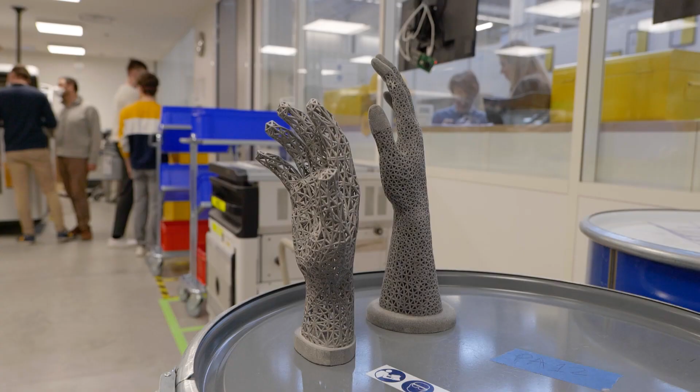Today I've got the absolute pleasure to be at Decathlon in France on behalf of AMFG. Arnaud, thank you very much for this great opportunity. It's been an absolute pleasure walking around this phenomenal facility that you have. Now, firstly, tell us about your business and how it started. Thank you for being here.

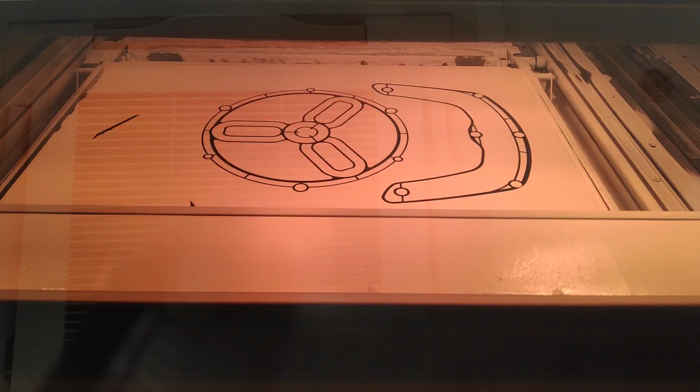The business of additive manufacturing in Decathlon starts around 7 years ago. We started very small, with 2 guys, 3 guys, with 1, 2, 3, 4 printers. And we grew step by step, introducing more technologies. We started with prototyping for the conception teams close to here, in this site of the B'Twin Village. Then we moved to spare parts, production parts also. And now we produce thousands of parts every year for our facilities all over the world in Decathlon.

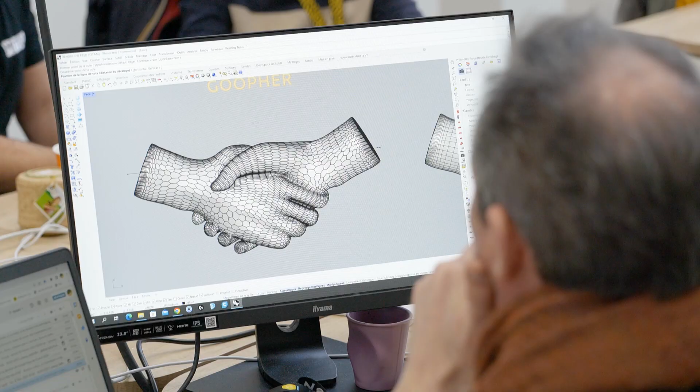Now, all around the world - I want to give our audience a bit of perspective on how large Decathlon is as a business. You have over 80,000 employees around the world, is that correct? We have almost 100,000 employees right now in the world. We are present in more than 42 countries, so it's really a large company. And we design and create our own products. Having an additive manufacturing lab internally really saves us a lot of time, saves us money, and helps us make better products.

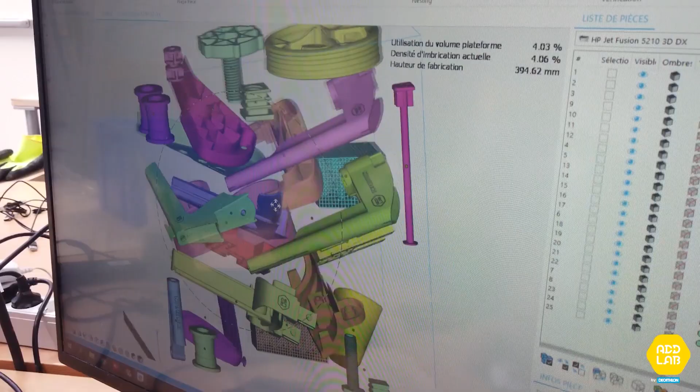You're actually the largest sports retailer in the world, I believe. Yeah, indeed. Now, AMFG - we're going to be talking about their software - but firstly, can you explain why you personally wanted to get into additive manufacturing?

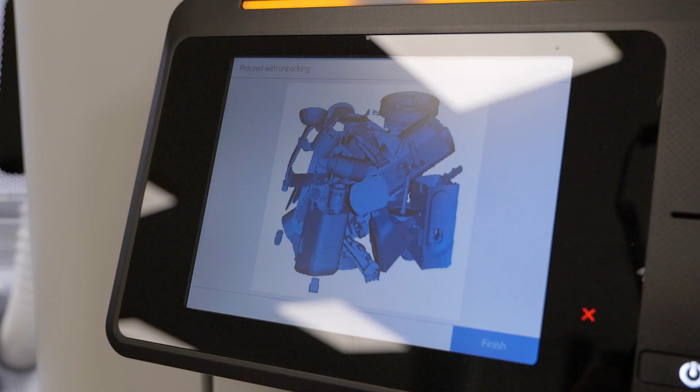When I met Julien, I discovered a bit of additive manufacturing. I just saw some videos over the internet, and it was really the beginning of this technology. I thought it was really cool. And when I went deeper into additive manufacturing, I discovered the full potential this technology has over the industry, over the supply chain management. And I really wanted to be part of it. I said, okay, this is something very cool that can change the world, and I want to help the world be better thanks to additive manufacturing.

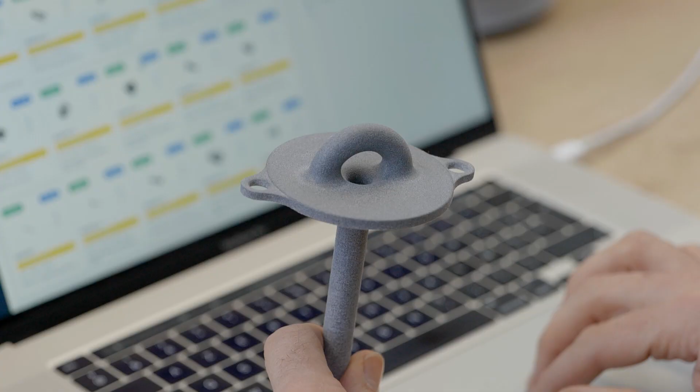And how does AMFG play its part in this strategic partnership that you have together? AMFG helps us to scale. Thanks to the software solution, we can deal with more orders from our internal customers. We can manage the same process for production, spare parts, and prototyping, which is really important for us, to have the same process and to save time and be more efficient.

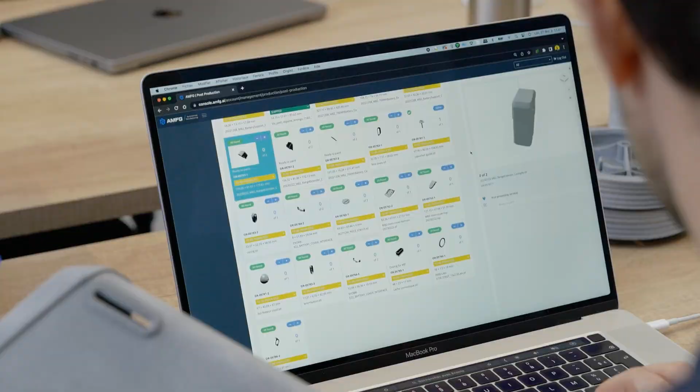And with the AMFG software, how does it help with automation? With automation, it helps us prevent errors, because the computer does stuff that before the operator was doing, so we can make it faster. Also, we can operate between AMFG and other systems, other software. For example, it can help us get the orders from the Decathlon website directly to AMFG, so the operator has nothing to do except production.

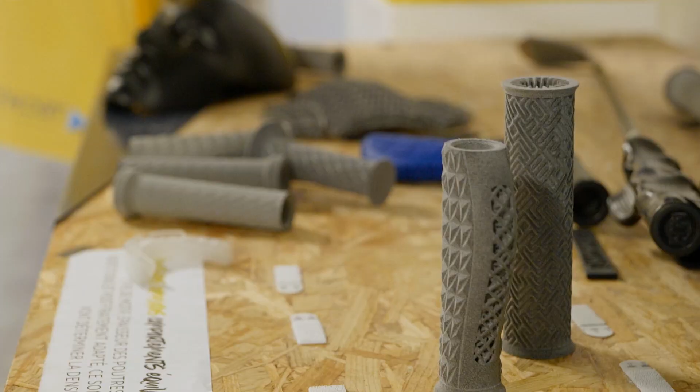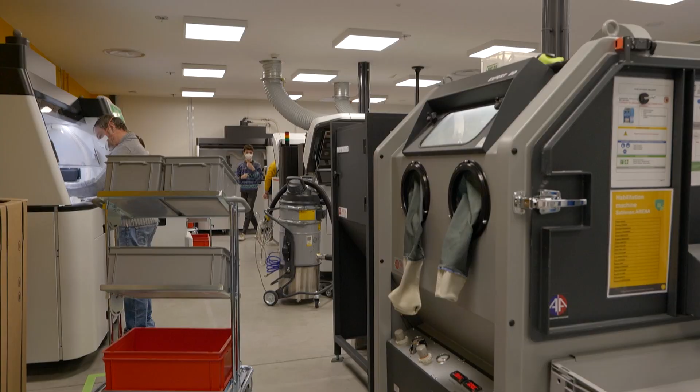So you've started to make the additive manufacturing parts in production. What is the vision of this business? Is it going to be rolled out globally? How many parts do you think will be made in an additive way, and what benefits will you get from this as a business? There are still a lot of opportunities to develop additive manufacturing for production. Right now, in the first 2 months of 2023, we produced almost as many parts as last year. So it's really something that scales a lot.

Our vision is really to build a network of different manufacturers. For the moment, we produce all the parts internally, but our vision is to develop the right process and the best solution, including software solution, to have a kind of package and recipe that we could give to our suppliers, so they can produce where it's needed. For example, if we need parts in Asia, it's totally silly to produce in Europe and send to Asia. It's better to have a good manufacturer in Asia, or in Europe, or in the US. That's really our vision, and we are working hard on that.

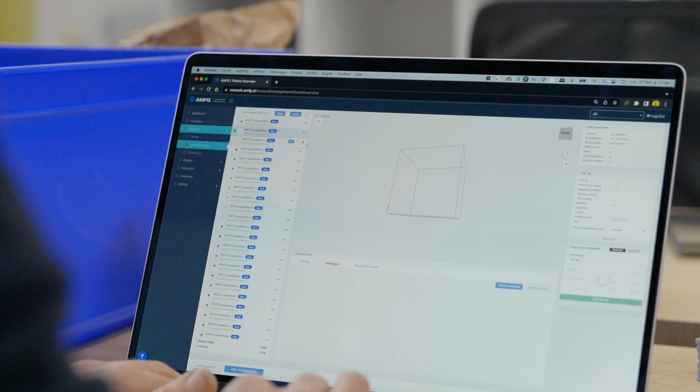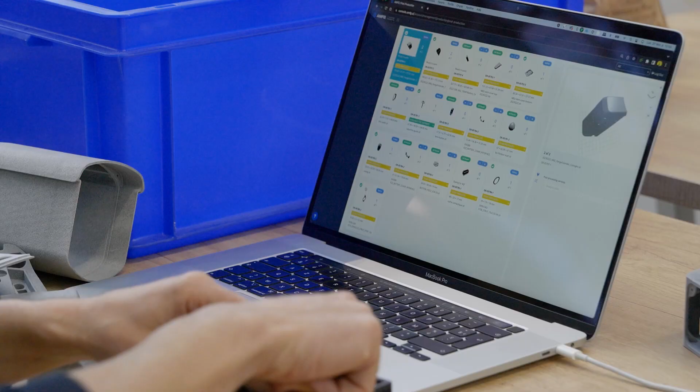In regards to the software and AMFG, could you run your business without them? No, I don't think so. Definitely now the business is too big, and we really need a good software solution to rely on. When we started the journey, I think we stayed like 2 weeks without having software, and since the beginning, we introduced a software solution to help us be more productive, and we keep this way now with AMFG.